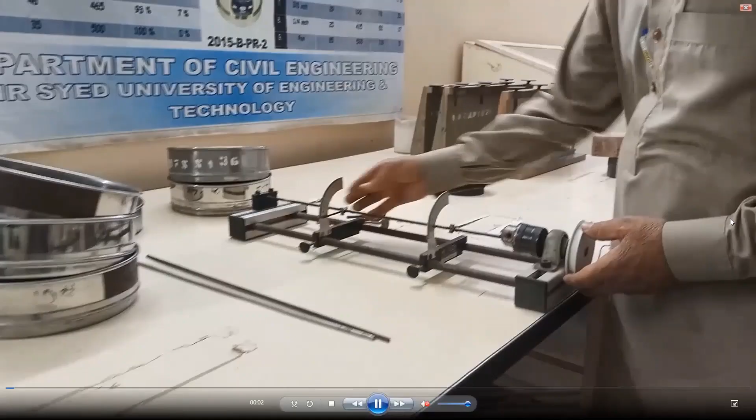Hello friends, in this video I am going to tell you about the torsion test. This apparatus is known as the bar test, and it is experiment number 10 of strength of materials. You can see the lab attendant is showing you the two bars we have to use: one is the steel rod and the other is the aluminum rod, and we have to find out the torque and the angle of twist theta.

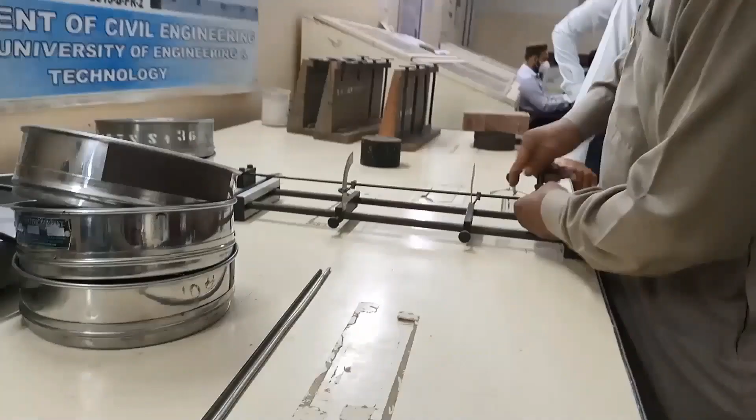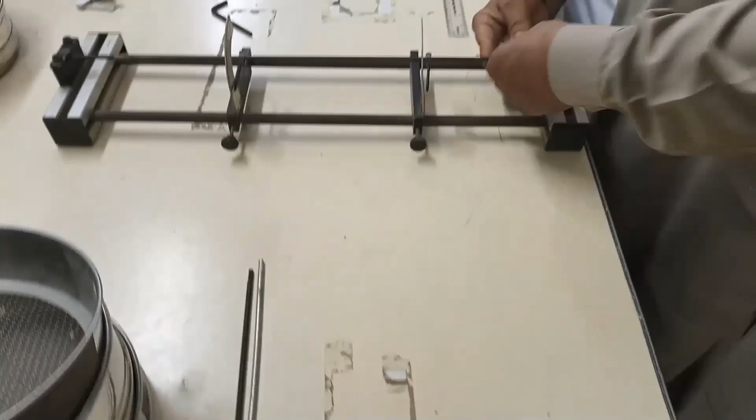So how can we do that? Let's have a look. First, the lab attendant is fixing the steel rod over there, and then he will perform the test. You can see there are two curves over the apparatus. There you have to find out the observed angle of twist, that is theta.

And you can see there is a circular white rod, and you have to measure its diameter with the scale, or you can do it with the vernier caliper. Now the lab attendant is trying to put the thread over this rod, and you can see there are two curves with angles mentioned on them. The first curve is at a 200 millimeter distance and the other one is at 400 millimeters.

So you have to set the curves accordingly, because there are adjustable screws, so you can adjust them yourself. Now the lab attendant is putting the load. The first load you put is 5 Newton, then you increase the load by 5 Newton: 10 Newton, 15 Newton, 20 Newton, 25 Newton, 30 Newton, 35 Newton, and the last one will be 40 Newton. So you start from 5 Newton and go to 40 Newton.

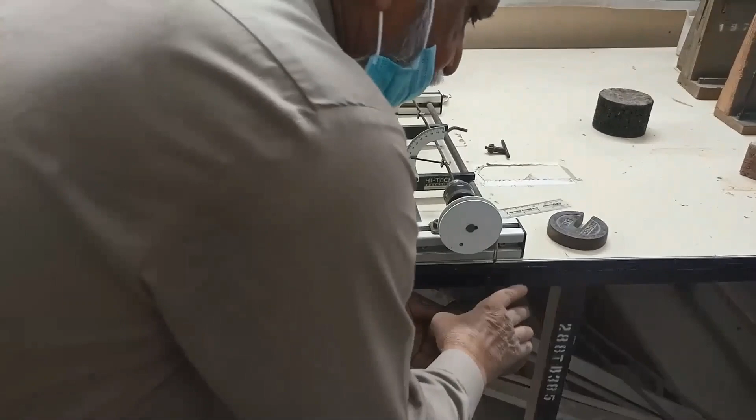So you can follow the table of 5, or you can say you increase the weight by 5 Newton, but it's up to you. I think it is a good criterion to find out the results or observations in this experiment with the bar apparatus. Now notice that the loads are very heavy, so you have to be very careful when entering the lab. You should not wear sandals; you must wear boots.

Now you can see the lab attendant is changing the rod. The previous one was the steel rod, and now he is fixing the aluminum rod. So what does that mean? You can change the rods. You can also use a copper rod and other rods, but right now we have two rods: the aluminum and the steel rod.

Now you have to arrange these curves with the adjustable screws at distances of 400 millimeter and 200 millimeter, which the lab attendant is fixing with the Allen key. The first curve will be at 200 millimeters and the other at 400 millimeters from the start. At these curves there are two pointers. When you put the load on, the pointers will change position, and then you have to note down the reading.

The first column is hanger load, where you write whatever load you are putting: 5 Newton, 10 Newton, 15 Newton. The other column is for the torque, in units of Newton millimeter. You have to multiply that load with the diameter of the white curve you see in front of the bar apparatus, so measure its diameter with the scale.

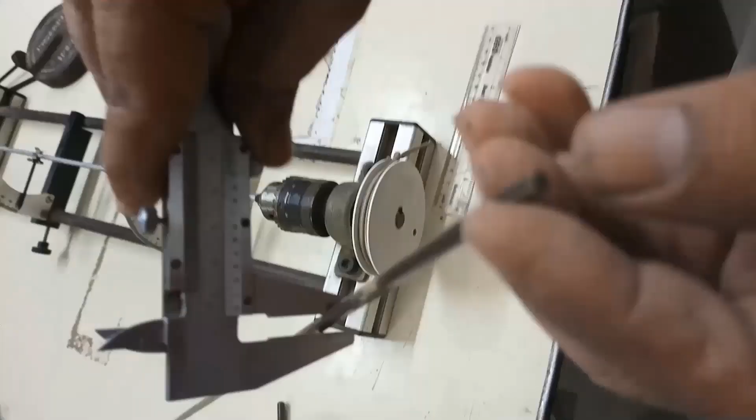So you have to calculate it and note down the reading. And you can see this student is applying the load. Now we are finding the diameter of the rod which we put in the bar apparatus with the vernier caliper, and wherever the line is coinciding, you have to note down that reading for the polar moment of inertia.

Okay students, you have seen how to perform the experiment in the laboratory, and now I am moving towards the manual. This is experiment number 10, Strength of Materials, Department of Civil Engineering. The objective of this experiment is to determine the relationship between torque and twist of a circular cross-section specimen, to be investigated in terms of a formula.

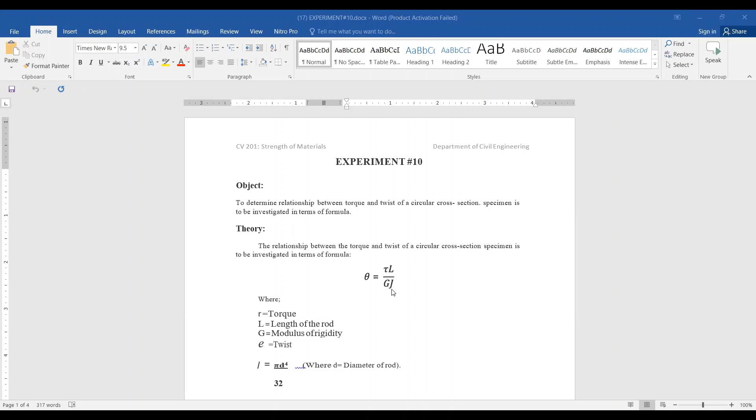We have already discussed this formula in the theory classes: theta, the angle of twist, equals TL over GJ. So what is T? That is torque, L is the length, G is the modulus of rigidity in PSI, and J is the polar moment of inertia. So what is the formula for J? J equals pi d^4 divided by 32, where d is the diameter of the rod.

I have already told you while we were performing the experiment in the laboratory, we were measuring the diameter of the rod at the end with the vernier caliper. So whatever diameter you get from there, you will put it here for the calculation of the polar moment of inertia.

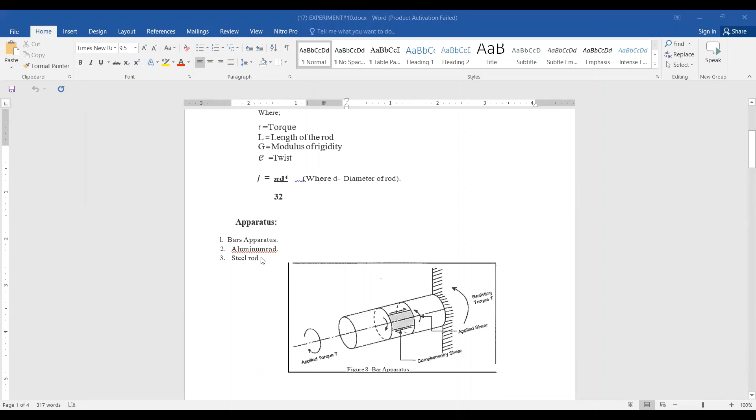You can see there is a mistake here: theta is the angle of twist, G the modulus of rigidity, L the length of the rod, tau is the torque. And this is J, that is pi d^4 divided by 32, which we have already studied in the theory class. This is the bar apparatus, and we had two rods, an aluminum rod and a steel rod.

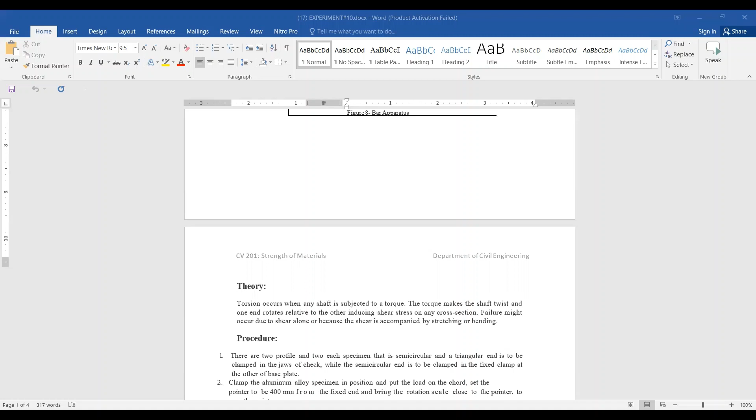Next, you can see the definition in the theory. Torsion occurs when any shaft is subjected to a torque. So torsion always occurs whenever torque is applied. Torque makes the shaft twist, and one end rotates relative to the other, inducing shear stress on any cross section. Failure might occur due to shear alone or because the shear is accompanied by stretching or bending. If bending or stretching occurs, failure occurs. So what is the procedure to perform this experiment?

I have already told you in the laboratory experiment. Now this is the observation table. How can you put all the values here? For example, when we perform the experiment for steel and for aluminum, there are two observation tables. First, we have the hanger load, whatever load we are applying in Newtons. We had weights in Newtons in the strength of materials laboratory.

So we have to put the load, for example, 5 Newton, 10 Newton, 15 Newton, 20 Newton, 25 Newton, 30 Newton, 35 Newton, and 40 Newton. And for the torque, as I have already told you, you have to measure the diameter of the white disc in the apparatus.

Whatever diameter you get of that white circular disc, you have to multiply that diameter with this load N, and you will get the torque. So this column is for the torque. Then you have twist of rod over 400 millimeter and degrees over 200 millimeter. The first reading was at 200 millimeter and the other one at 400 millimeter. So there will be two columns in this single column.

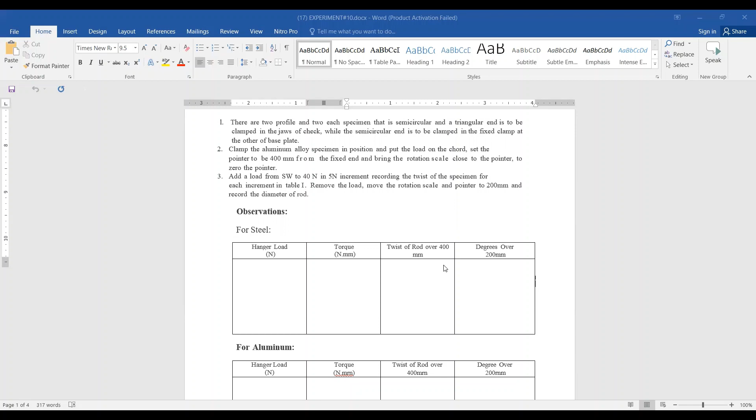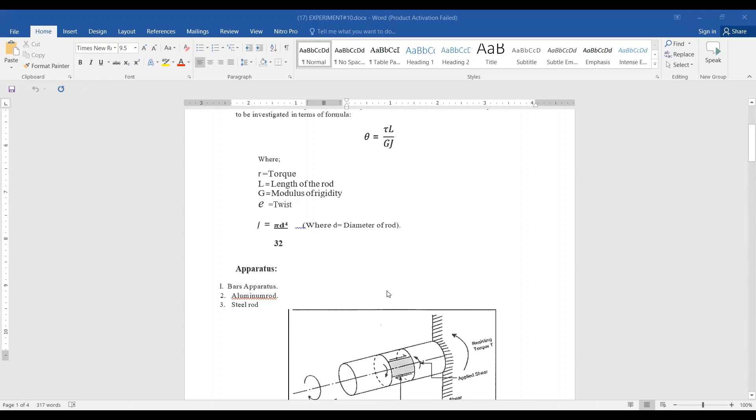One is the observed value, and the other one is the calculated value. Same goes for this observed value and the calculated value. The calculated value comes from the formula for theta, the angle of twist, given over here, and the other one you have taken as a reading from the experiment.

And for the aluminum, same goes for it. You have to take the same load over here. You have to put the torque here, and the twist of rod, you have to check it and put it here. Let me tell you how you can make your observation table on the Excel sheet. And one more thing you have to do over here is make graphs. So how can you make graphs?

For example, there will be the graph between the torque and twist of rod. On the x-axis you have to put torque, and on the y-axis you have to put twist of rod over 400 millimeter. So there will be two lines for the calculated and the observed value, and degrees over 200 millimeter. So torque versus degrees over 200 millimeter, observed and calculated. So there will be two lines.

And same goes for the aluminum. So there will be two graphs for steel, two graphs for aluminum. In each case, draw a graph of twist, draw a straight line through the points; twist is directly proportional to the torque. Keep in mind your angle of twist should be directly proportional to the torque. So let's have a look at the Excel sheet and how I can make it.

So let me open this. There will be the Excel. I am going to open it and then I will share with you. I am waiting for the Excel sheet to open. Let's wait for a while. The speed of my system is getting slower, so it is taking time to open. I am still waiting. Okay, it did not open yet. Again, I have to try it. I need to open the Excel. Now it is going to open. It is on the way.

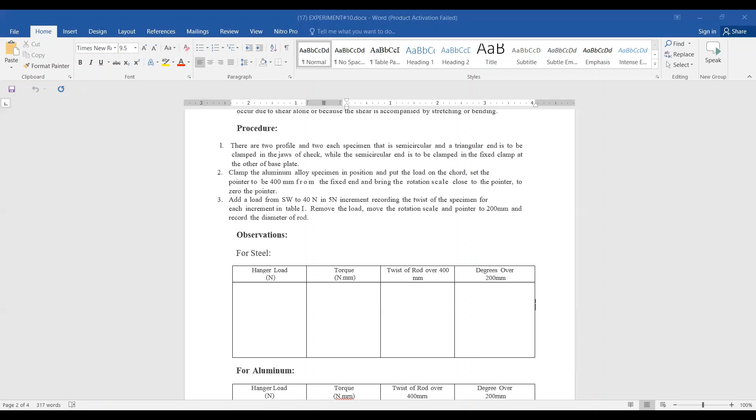Now it is done. So let me open the blank Excel sheet, then I will share how you can make it. Let me share it with you again. And this will be the Excel sheet. I have some readings, that is the supposed one. You have to do it yourself. Now let me save this, and I am going to save it in the recordings of 18th of April, with the name Torsion Excel graphs. So I will put this name.

So first of all, the observation table. And now for steel, so I am moving forward with the steel. Now I will put here hanger load. Let me put it here. So hanger load in Newton. Then we have another column, that is of torque, and the unit for this is Newton millimeter.

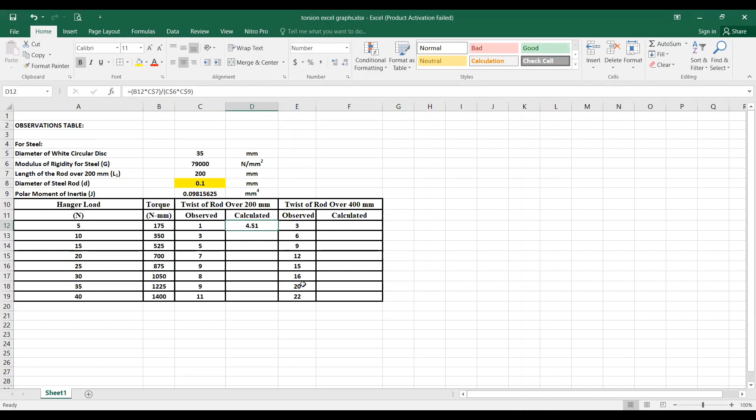And it will be divided by GJ. What is G? G is this one, so I have to apply dollar here again, and then multiply with J, which will also remain constant. I have to apply dollar because this value is fixed for all the values, and I can round it up, as I told you in my previous videos. Then I will apply drag and drop. So this is the way to calculate the value.

And one more thing, L2 is left. So insert. L2 is 400 millimeter, because we are taking twist over a rod of 400 millimeter. We will apply the same formula here, but there will be a change. So I will copy this column, and paste it here.

First one is TL. T is fine, L will be changed. L2 is C8, so I change this to 8, divided by GJ. G is 79,000 multiplied by polar moment of inertia, which remains the same. I apply round up, then drag and drop it and center it. So this is the way to find it out. Next, how can we make the graph?

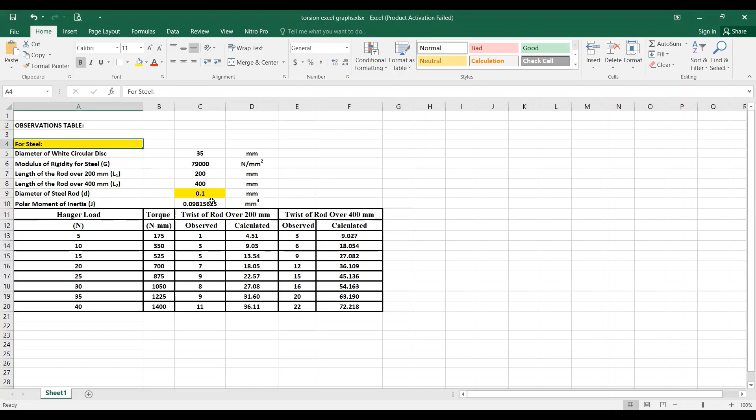This will remain the same because you are taking readings again at 200 millimeter and 400 millimeter for the aluminum rod. The diameter of the aluminum rod obviously will be the same, but you have to check it and find it out, and then you have to put it in the polar moment of inertia. The remaining formula and everything else will remain the same.

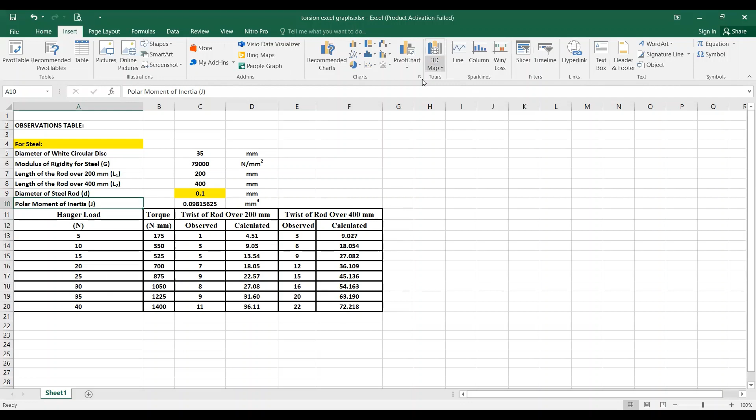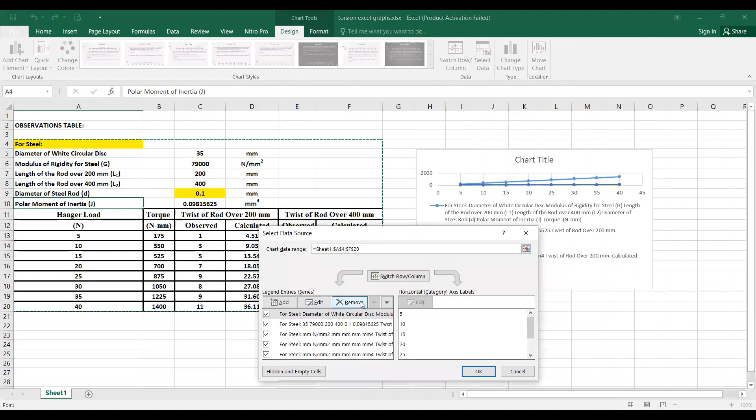So what you have to do here is plot the graph. And how can you do that? Let me share with you. You have to go into the insert section. When you go to insert, you have to select this scatter diagram. It is taking so many things, so you have to go to select data and remove everything that is coming on the graph.

We have to draw the graph between torque and twist of rod. We have to take torque on the x-axis. So we are going to add torque versus angle of twist over 200 millimeter, and this is for steel. So what we are going to do here is torque versus angle of twist, for steel.

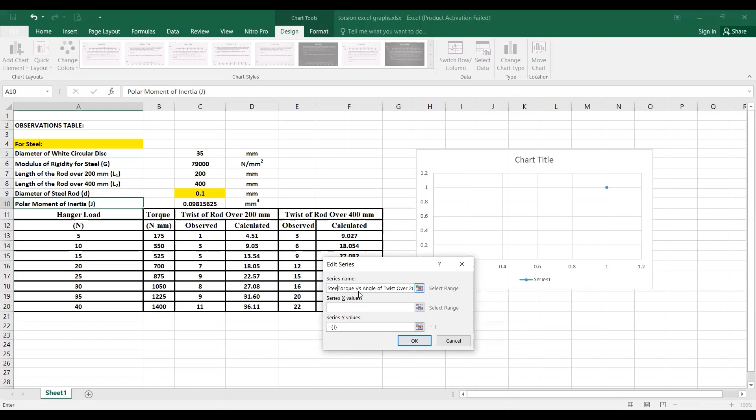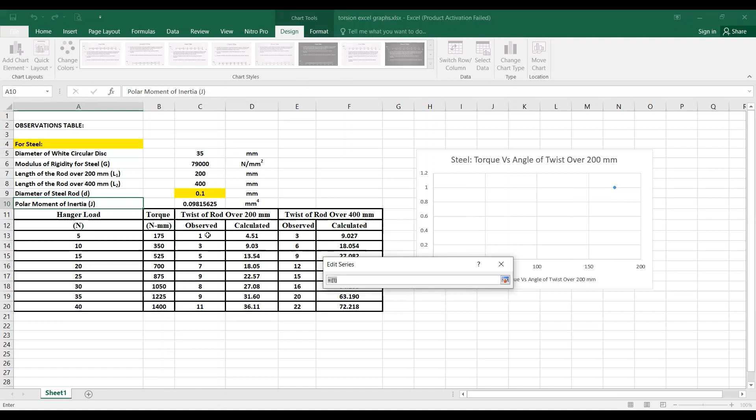Now I am going to take x values. The x values will be the values of torque, and for the y values you have to take two values. The first one is the observed value. Now I am going to add another one: steel, torque versus angle of twist over 200 millimeter, observed, not calculated. We forgot to write observed there, so we will put it there. The x value will be this, and this will be the calculated value over 200 millimeter.

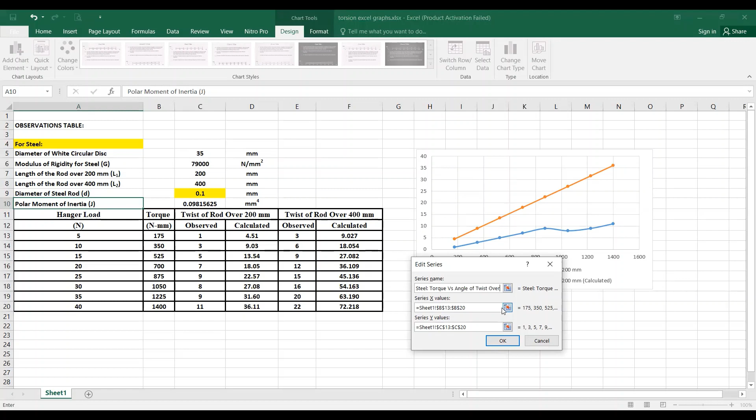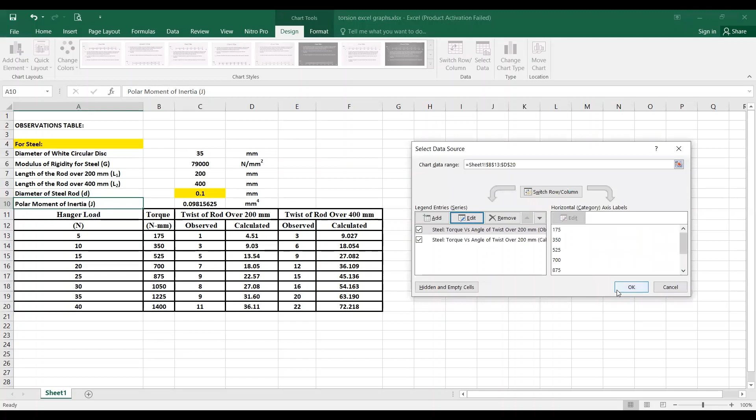It's done. Now I am going to edit, and here I am going to put angle of twist over. Let me erase all this, it is making a problem. I am going to write: steel, torque versus angle of twist over 200 millimeter observed. So this is done, and now I am going to click okay.

Then I am going to add axis title, chart title, and the legend is already there. So what will be the axis title? The axis title will be torque, and you have to write down the unit as well. Torque is in Newton millimeter. On the y-axis it is twist of rod, or angle of twist over 200 millimeter. You can put theta there and represent torque with tau, and it is obviously in radian, so write down radian. It's the angle measurement.

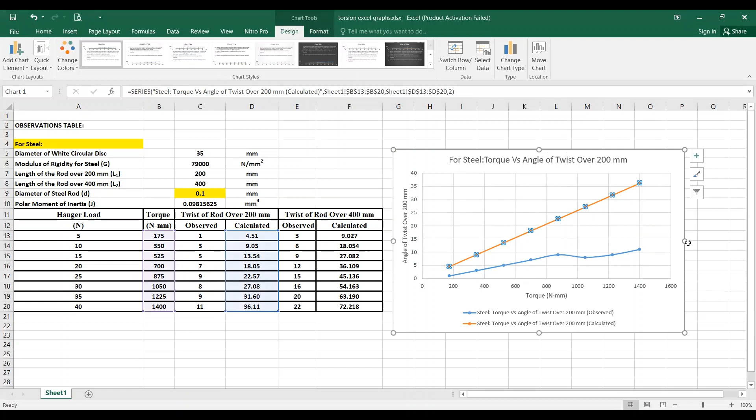For the chart title, put what I told you: steel, torque versus angle of twist over 200 millimeter. This will be good. If you want to add something more, you can do it. You can make your graph attractive; I have already told you how, so you can do it yourself. This is the one graph I have made: torque versus angle of twist over 200 millimeter.

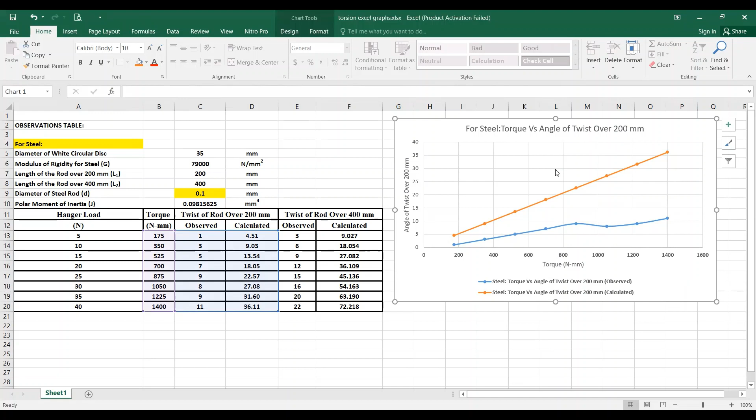There will be another graph, so let me show this. You can also put four lines there and compare the steel observed values with the aluminum as well. You can see there is a slight difference here, but it's okay. You can see your readings.

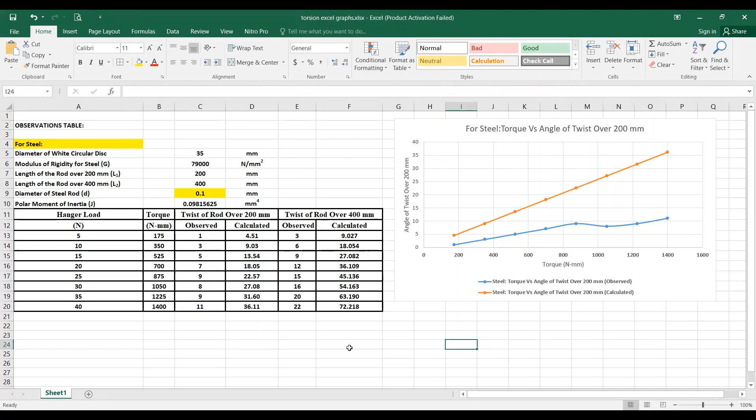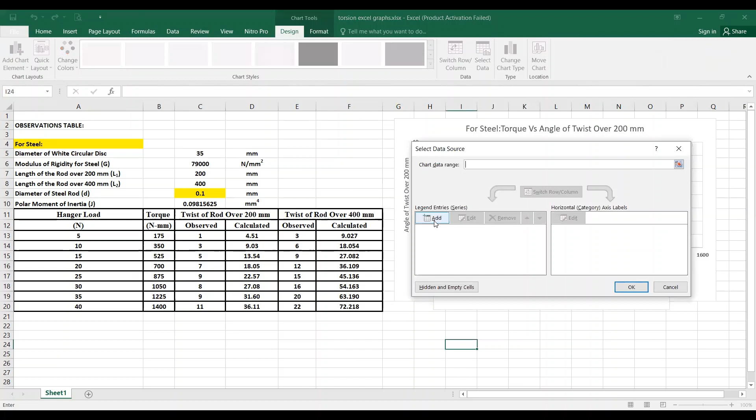Now I am going to add another graph here for 400 millimeters. We have to select data and add for steel again. I write torque versus angle of twist over 400 millimeter, observed. The series X values, obviously torque, remain the same, and the observed values go on the y-axis. Now it's done.

I am going to select data again because I have to add other values, for steel, the calculated one: steel, torque versus angle of twist over 400 millimeter, and that is the calculated one.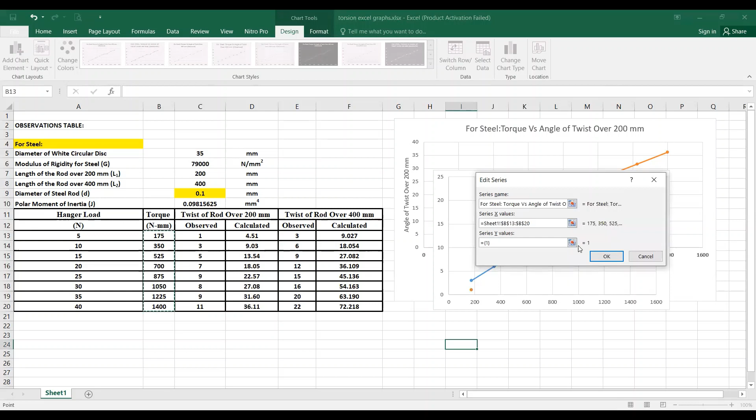And X values will be torque again, and Y values will be the calculated angle of twist. So now it's over, and this is about our diagram.

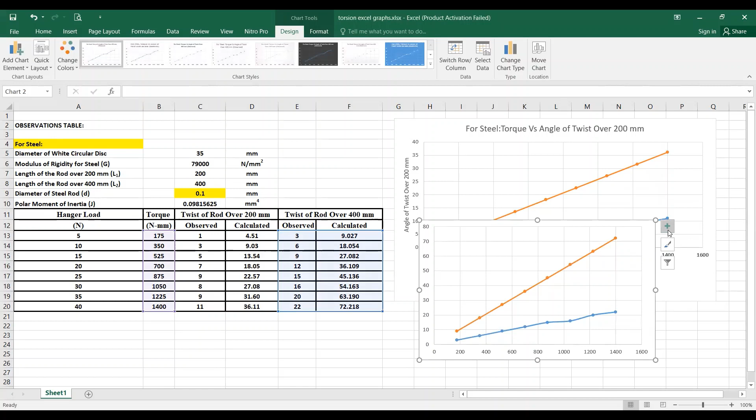Whatever is left - axis title, chart title, legend - these are the two graphs you can see here, and I can write down its title: for steel, torque versus angle of twist over 400 millimeter.

Now axis title. Axis title will be torque in Newton millimeter, and axis title on the y-axis will be angle of twist over 400 millimeter.

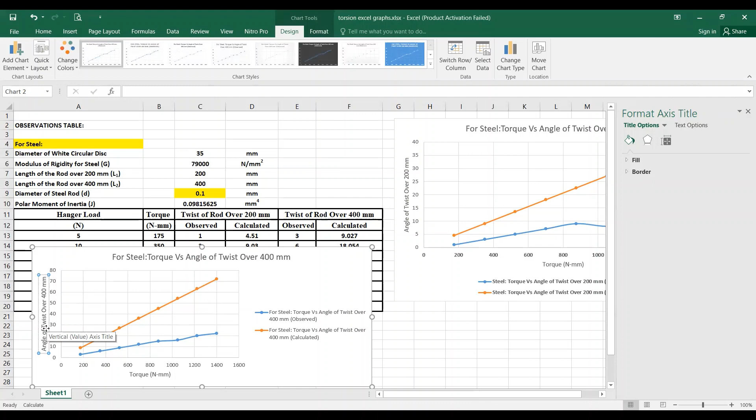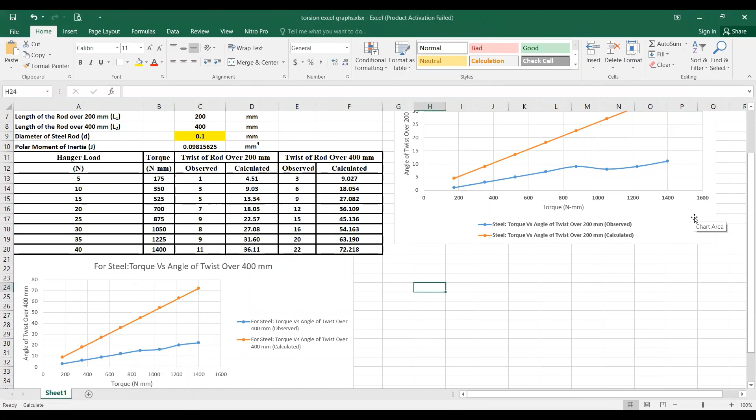So now I can put this graph here, and you can see, you can make your graph more decorated. Let me see whether it is showing on your screen or not. And you can see this is the first graph.

So this tells you that this is the one observation table for the steel. Now you have to make another observation table for the aluminum yourself. What you have to consider is the modulus of rigidity, you have to search it out from the internet, and how I Googled it and how you can convert it according to the unit. You must know it because I have discussed all these things in the theory classes.

Now you have a better idea of how to perform this experiment and do the manual work. Whatever calculations you have to do, whatever formula you applied, you have to do all the calculations one by one in the calculation section of your manual. One more thing, these are the two more graphs for the aluminum, and you have to make another observation table for the aluminum as well.

One more thing, the diameter of the steel rod I have assumed here, you have to calculate it yourself from the vernier caliper. You have to measure it yourself. And I have already told you how to take the observed reading and calculated readings from the formula of angle of twist, that is TL over GJ.

That is T for the torque, so you have to multiply this torque, and you can see this formula. What I have done here, you take this torque multiplied by the length, that is 200 millimeter for this twist of rod, divided by GJ - modulus of rigidity multiplied with polar moment of inertia J - and the same goes here.